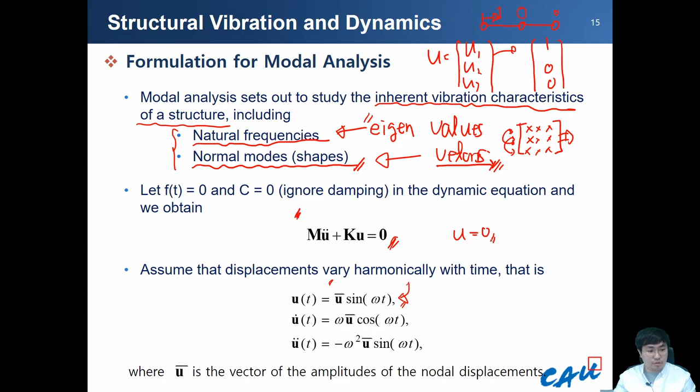Sometimes this can be a solution of this equation. However, this is a trivial solution. We don't need that kind of solution, because it is obvious, but we need some displacement behavior. So we should select a different type of solution among the various types. So this harmonic oscillation, the sine wave equation, can be a strong candidate for the solution of these equations. And then to solve this equation, we need the derivative form.

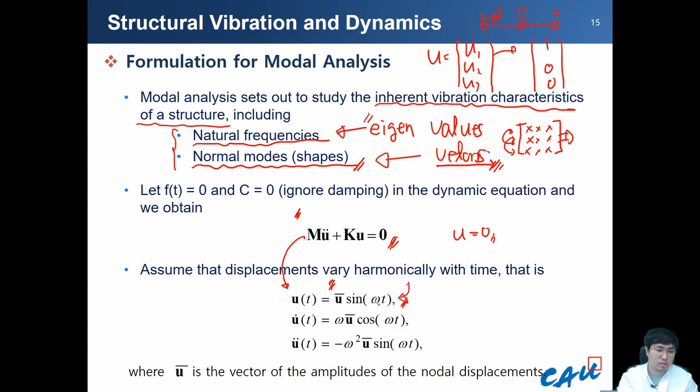So here, u is a vector of the amplitudes of the nodal displacements, and we are going to obtain the frequency omega. After inserting this into the equation, we can easily summarize the equation. Although we have the sine terms, this cannot become equal to 0, so for this equation to become 0, these two terms must become 0. However, we already said that this cannot be that vector, because that is the trivial solution, so we need a non-trivial solution.

Sorry. So finally, to obtain the exact solution, this part must become equal to 0. If this part is a matrix and it has an inverse matrix, we can multiply the inverse matrix on both sides, and then finally we obtain this kind of situation. Anyway, this becomes 0, so we don't want that trivial solution. So that means this part cannot take an inversion. That means the determinant of this matrix is equal to 0, meaning it doesn't have any inversion.

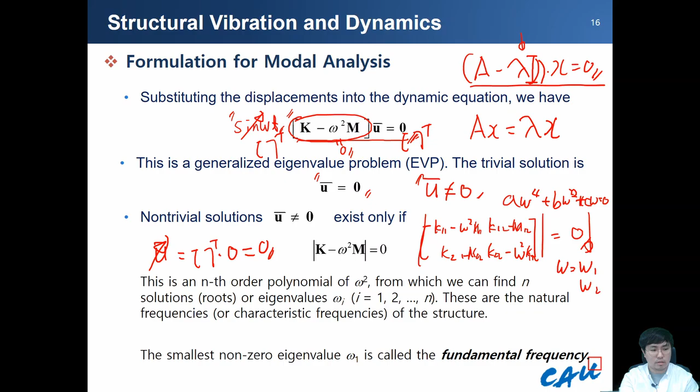You already know that each eigenvalue has its eigenvector. So after obtaining the solution, in the previous step, this is not correct. We have two different eigenvalues, and after inserting this value here, to match this solution this part does not have an inverse matrix. So to match this value, we should find some vector. The first eigenvalue returns the first eigenvector, and the second eigenvalue returns the second eigenvector. We call this vector the mode of the solid structure.

This mode has some characteristics. The first property is that they satisfy this kind of relationship. If we have two different eigenmodes, actually eigenvectors, when you multiply them with the stiffness matrix, they become equal to 0. And also when you multiply the different mode shapes with the mass matrix, which can be a lumped matrix or consistent mass matrix, they become 0. We normally call this the orthogonal characteristic, or orthogonality. Orthogonality is a very important characteristic.

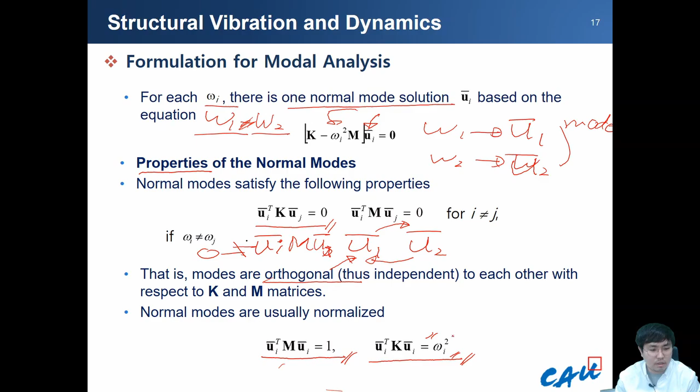However, if we multiply the same vector, in this case they cannot become 0 anymore. So here they can return unity values, or here an important characteristic is they return the frequency squared values.

Note here, the magnitude of the displacement or stresses in normal mode analysis has no physical meaning. That's very important. Why does this mode not have any physical meaning? Let's go back to our engineering mathematics, to obtaining the eigenvector. How can you obtain this value? There are hundreds or thousands of vector sets that match this eigen matrix equation equal to 0. So for lambda or omega 1, there are many vector sets that match this equation. That means we can select.

There are many arbitrary vector sets, but they have the same direction, or principal direction. They have different magnitudes with the same direction.

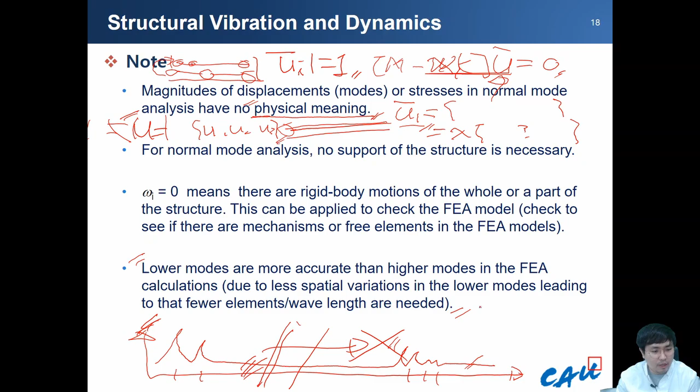This is a clue that can reduce the size of the system. Here I check 1, 2, 3, 4, 5 eigenvectors or eigenvalues. That means they have a 5 degree of freedom system, so this matrix can become a 5 by 5 matrix. However, these 3 eigenvalues or eigenvectors can be negligible.

That means that I need only 2 dynamic behaviors. So the other 3 eigenvectors, when we consider only the 2 degree of freedom system, here 2 by 2, they can also show the same behavior, but this part is equal to 0. So these 2 systems, the first and the second system, show the same behavior. Here I can reduce the system.

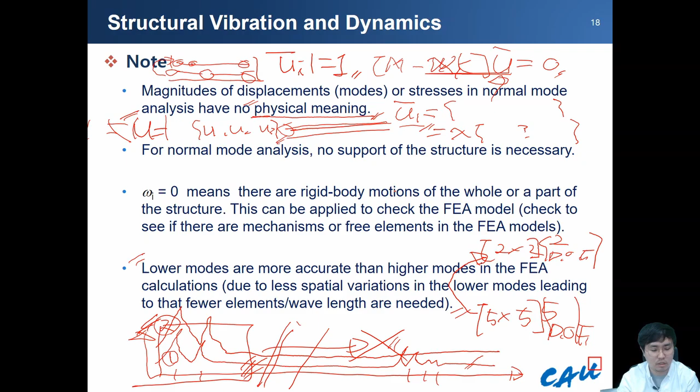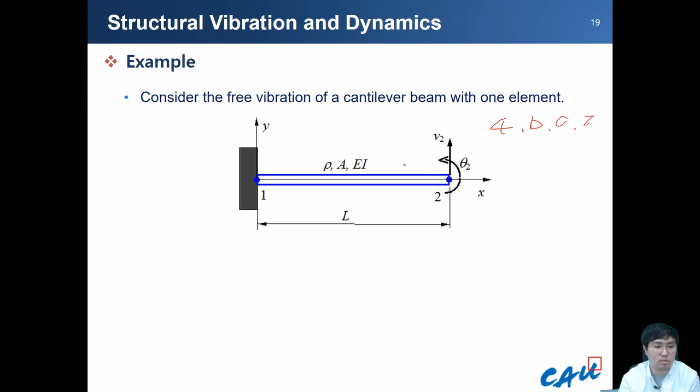Next, some examples. Let's consider the free vibration of the cantilever beam with one element. This beam element is fixed on the wall, and it has a density, cross-section area, Young's modulus and inertial moment. So this beam has 4 degrees of freedom: 2 are for the displacement in the y direction, and the others are for the rotation angles of each nodal element. And then here we can have these kinds of equations.

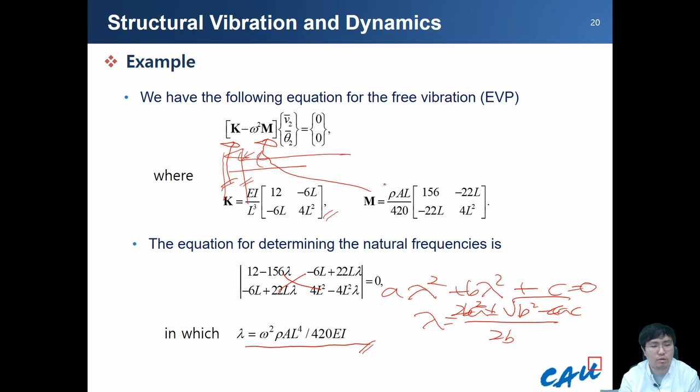The exact solution of the first 2 natural frequencies for this problem is very similar. So why does this show a slight difference? It is because we use a very large element size, so if you want a more proper value, you can use a higher number of elements. For example, here, how many? 1 2 3 4 5 6 7 more.

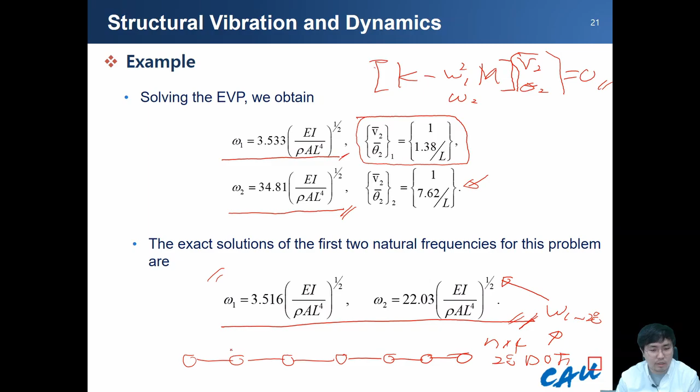We obtained 28 degrees of freedom. In that case, we also obtain 28 eigenvalues. Among them, the first and second eigenvalues show very similar values compared to the analytical solution.

Next is the modal equation. Using the modes, after calculating the eigenvalues and eigenvectors, you can transform the coupled system of dynamic equations into an uncoupled system of equations, or modal equations. What is the meaning of this? This is our modal analysis equation.

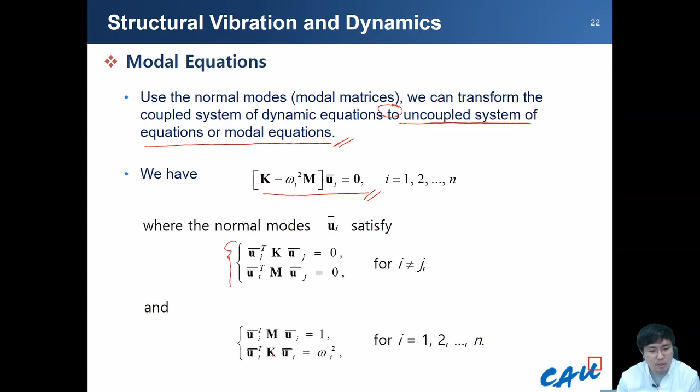So after calculating the natural eigenvalues and eigenvectors, these eigenvectors have this characteristic. What is the meaning of this? This is the orthogonality of the eigenvectors. It is mathematically derived, and if the same eigenvector is multiplied with the mass matrix or stiffness matrix, the mass matrix becomes 1, and the K stiffness matrix returns the eigenvalue squared.

So after the modal analysis, we have n sets of eigenvectors. In the previous slide, we had only a 2 degree of freedom system, so only 2 eigenvectors here. But similarly, with the first mode and the second multiplication, we can change it to look like this with the transpose.

At that time, for each component, the first component returns the first eigenfrequency squared, the second 2 by 2 element shows the second eigenfrequency, and the n by n element returns the nth eigenfrequency value here, so we can obtain this kind of equation.

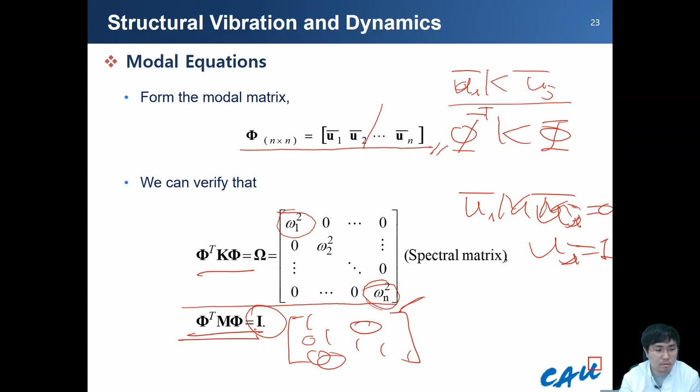And similarly, the mass matrix returns zero values for different vectors, and the same vector returns 1. That means the elements return 1 1 1 1 on the diagonal, and all remaining are 0. So this is the identity matrix. Based on these characteristics, hold these matrices for the next slide. And also the transformation of the displacement vector.

Our displacement vector is u, and these values can be represented like this: u1, u2, and un are eigenvectors, and z1, z2, zn are still unknown coefficients. So we can choose this kind of matrix form here. Let's recall our basic equation. What was our basic equation? It looks like this: C u dot and K u equal to f. This is our basic dynamics equation.

But we say that we can represent our displacement using a combination of the eigenvectors or eigenvalues, like this. So you can add this here. The eigenvector is independent of time, so you can easily obtain phi, but z is an unknown coefficient and a function of time. So you need this kind of thing here.

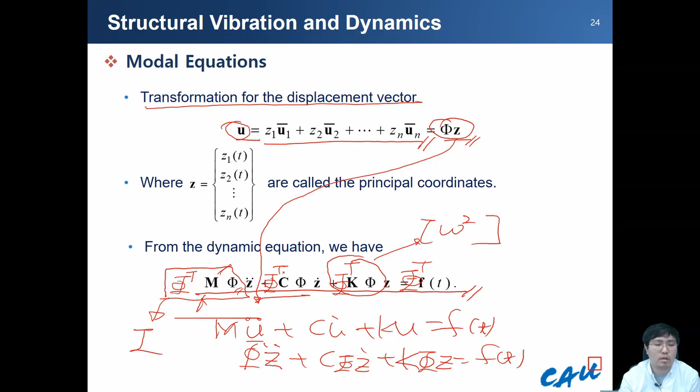We say that omega square matrices. We can neglect in here the damping coefficient, equal to 0, and then we can also neglect external forces. However, phi has those kinds of relationships in here, so that they become identity matrices, and then this becomes the omega matrices, and the remaining things are equal to 0, so that we can obtain this kind of equation.

So why do we need this equation? It is because in here, let's neglect the damping coefficient. So in the previous slide we had this equation. Similarly, what is z? z is a set of z1 to zn depending on your system. So in here, z1 dot dot, z2 dot dot, zn dot dot, and then with omega, and what is the z?

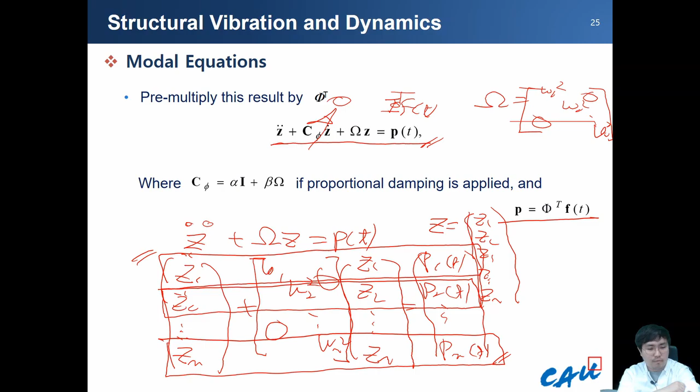In the previous equation, our stiffness equation or dynamics equation was always coupled. In the mass matrix, let's recall the consistent mass matrix, not lumped mass matrix. The off-diagonal terms always have some value. That means u1 and u2 are coupled in the first equation, and also in the second column u1 and u2 are coupled. However, in here we have independent equations.

Based on here, we already know these values and these values, and this is a boundary condition of the external forces, but slightly converted due to some eigenmodes. However, what is the unknown variable? zi is unknown. We want to solve this zi. This is an ordinary differential equation. You can easily obtain the solution of this ODE without considering the second or nth equation.